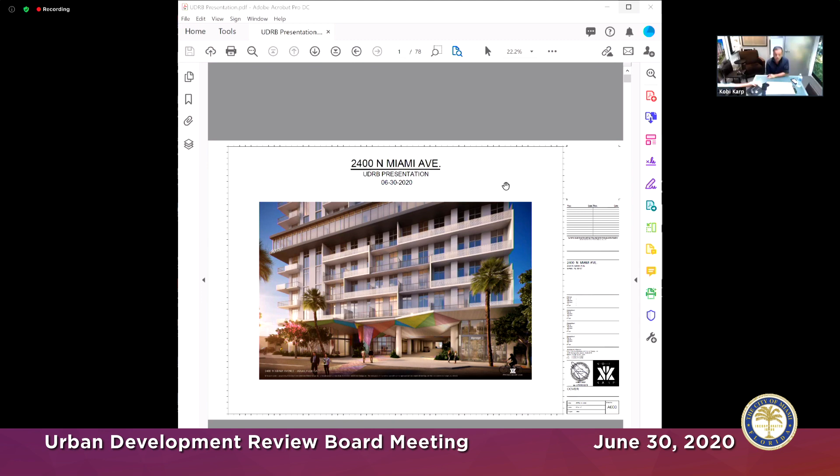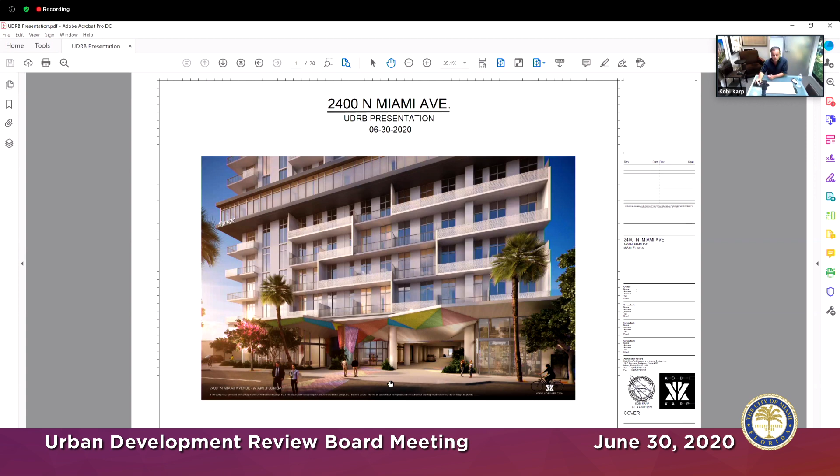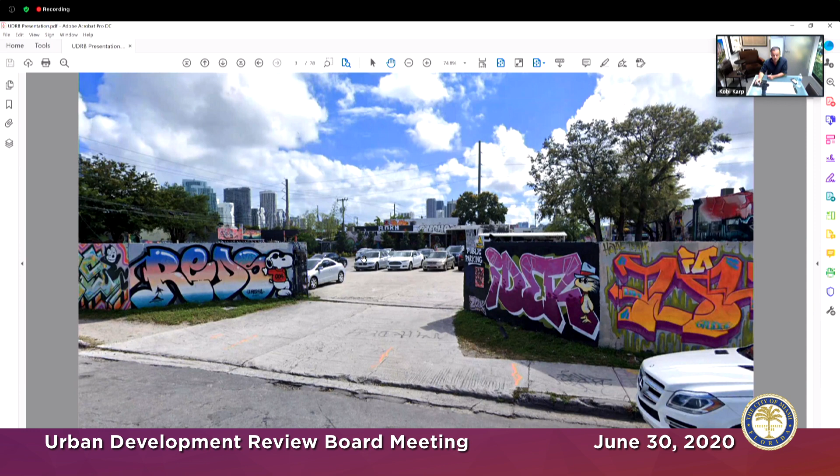This is the image at the ground level. So our site, as Mr. Warnick has mentioned so eloquently, is sitting on North Miami Avenue between 24th and 25th Street. It is currently being or has been used, as you can see, for these functions. It is an important location on North Miami Avenue. We met with staff and the neighbors. Everybody felt that there is an opportunity here on this site to make it a more open, tropical, urban connection

between 24th and 25th. Not only along North Miami Avenue, which obviously is more important, which is why we carved out the corners on 24th, carved out the corners even more so on 25th Street, and introduced not only the commercial spaces, but also some amenity and lobby in these areas, but also wrap it around in a very genteel kind of fashion where people can walk within the landscaping and sit in a nice protected area and walk onto the site. We felt that there is a greater opportunity to make the site porous and really create a more landscaped area from 25th Street to 24th Street, and really create a nice anchor to North Miami Avenue.

At the same time, I'll just take you through the building quickly if you give me a second. We're setting it back. We have a mezzanine parking. We have a typical parking level here with our studios wrapping around. This is level 2 through 5. This continues on to where we have a large amenity area, because obviously as the sun rises in the east and sets in the west, the building steps down into this direction, meaning towards 24th Street, and offers us sort of a unique stepping up effect right here.

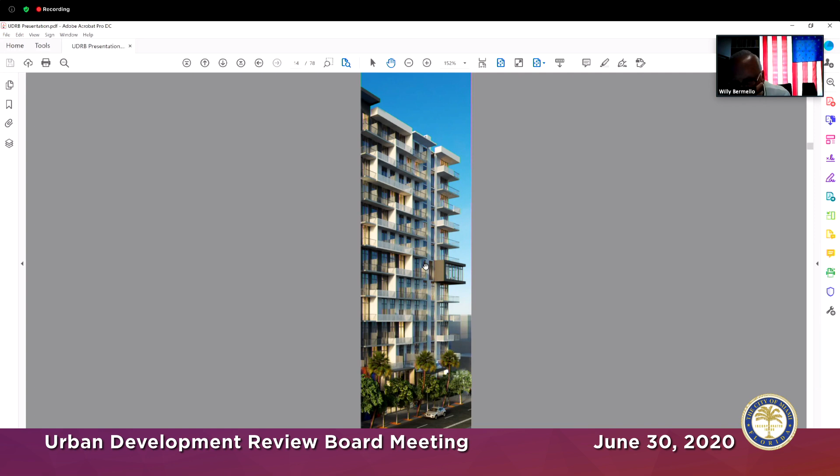Do any members of the board have comments or questions? Yes. I do. How do you want to do the process? Do you want to give everybody an opportunity? Yes, Robert, I think that would be the best way, and those that are more anxious go first, and those that are still thinking about comments can go towards the latter, and not everybody has to speak. Okay, give us a chance to speak. So you want to go first, Robert?

All right. Kobi, good to see you again. Hope everybody's doing well, and difficult times, that we'll get through it.

Can you go back to the ground floor a second, please? Yes, Robert, right away. And let me commend, I think you've done a very nice job in this project. I like it a lot. I think the way you have addressed the street is very, very nice. I think you have activated all three streets in a very nice way. One area that I'm very concerned, I don't think it really functions at all, is the service, particularly the trash area.

Basically you're going to have to take out your trash containers to the street to have the truck service them. Because I was looking at your elevations of the building, the ground floor is 15 feet clear, or maybe even less. So when you pull up the trash from the residential trash room, you have to take it out through the internal drive, which is very nice. You cannot do it in the loading zone. You have to take it out to the street for the trash truck to do the maneuvering.

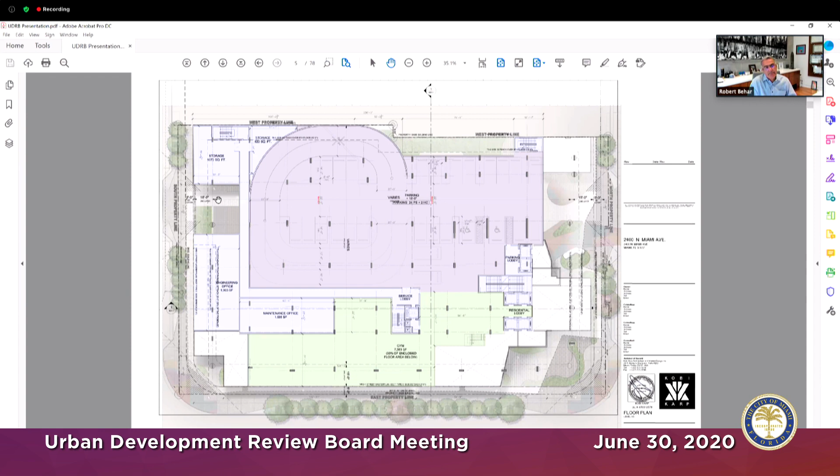So you have your ramp over that area. So you will not be able to carve it out so you could get a truck to do the maneuvering. You need like 23 feet to do that. Right. So how are we dealing with this, Taylor? We're bringing the truck over here and then bringing it over here, right? Yeah, we do have the double height carved out space on the south portion of the internal paseo as well, and we'll continue to study that with waste management.

But how many units is this, Kobi? This project? 236. And some units have 6 bedrooms. And you have a little residential trash room that is 480 square feet, according to this. And you have to drag those containers through your internal paseo. It seems to me that maybe the loading area, trash room, needs to be relooked at, because everything else is working very nicely. The ground floor is working, with the exception of that. And the elevation looked very, very good. So that's a concern to me, how the service really functions in this building.

No, Roberto, I think you have a very valid point, and Taylor and I are just sitting here talking, and we're going to study and flip these around potentially and get more square footage in there. Absolutely. We'll take care of that. Right here, you can flip these around. Robert, is that it? Yeah, that's it for me.

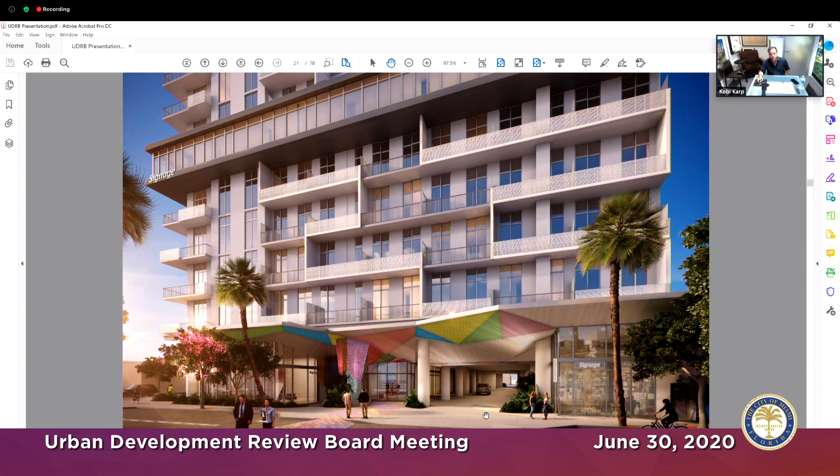And I think you are correct. That's why also the residential lobby and that whole circulation area over here promotes that kind of drop off. I think that ultimately, you are correct. It's a pedestrian circulation, and we wanted the pedestrian to come, walk through here, walk through the landscape, continue through. Look, I would like to find ways to improve this area, right? This rendering is just the beginning of it.

But I think that at the end of the day, when you look at the way we treated the Wynwood 25 Passage Paseo that connects the two streets, it became a very important destination for the project. I'm trying to go back to the ground level. But your comments are very well taken, Anthony. Let me study that and let me see what I can do on that.

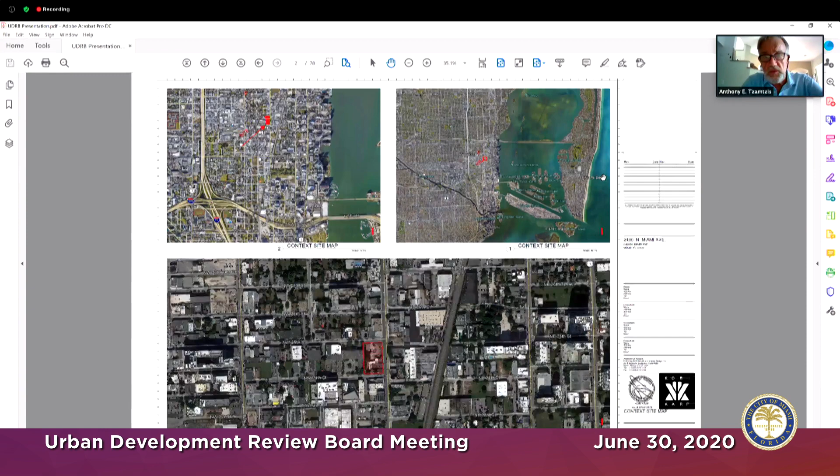Perhaps along the west property line, maybe there should be a way to walk along the west property line with landscaping and stuff, because I don't think it's very inviting to walk into a space that has a cover above you and the fumes of cars and stuff.

I don't know. I would like to see a portion of that completely without a cover above and with landscaping, and more friendly to pedestrians because of the nature of 24th and 25th, which are very pedestrian-oriented streets. Yep. Okay.

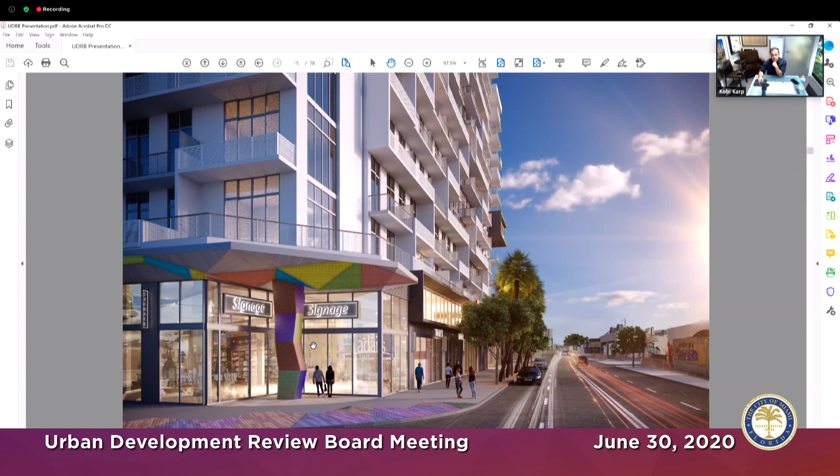Well, we go to the rendering from the south on North Miami Avenue. So what happens is that we have the parking behind this liner right here. What we have done is the stepping back of the building itself is right here, yet the corner pullback is right here on 24th Street. And then we did another pullback. This is a close-up of that corner treatment on 24th Street. And then also from right here on 25th Street, under this area right here, it's notched out even further.

So as the building does step up, and this pops out right here, the office, our niche is right here. This is the little juice cafe and lobby, and that's the gym. And then pedestrians would come, and this is the other retail on 25th Street. And then here's a close-up, if I may, of the same. You have a covered seating area that faces to the east and to the north. And this is the retail that goes further to the west. And then this is our lobby. The gym would be here with a staircase to the upper level, to the mezzanine level as well.

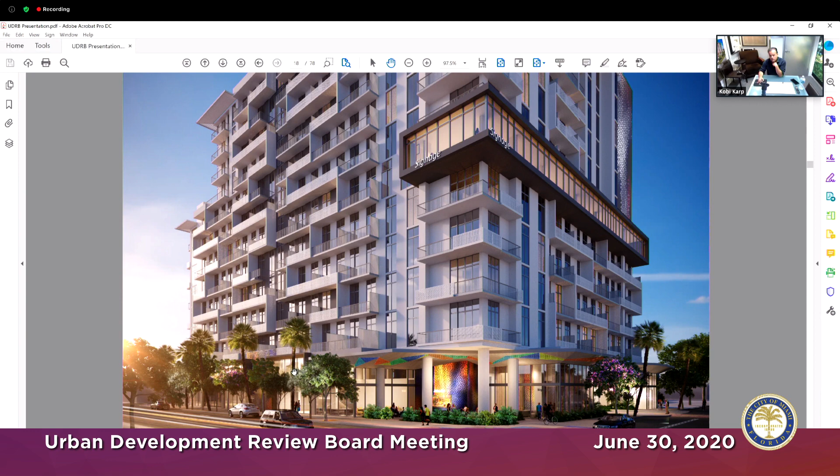If you just give me a second, I'll take you back to the ground level and I will be able to show you. And here you can see how we stepped up. So this is level 7, level 8. And then that's the amenity area carved out. But then at level 9, the building steps up. 9, 10, 11, and 12. Can you see my little hand on the bottom right-hand side? Yes. So this is level 9, 10, 11, and 12, so that you get more light and air coming here along a southern axis between east and west. And this is the landscaped terrace area.

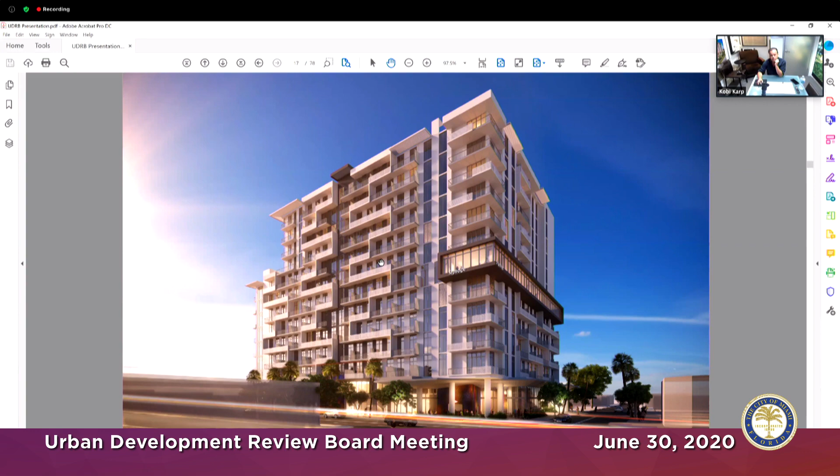And furthermore, you have it stepping up here, but let me get you to the ground level. If you just give me one second, Ligia, I'll put you over there. I'm trying to get, oh, I went the other direction, right, Taylor?

That's what happens when you're 58 years old. Wow, 58 already. Yeah, 58, Dean. You know, time flies when you're having fun. I believe it. Sorry. Excuse me one moment. Dean, you have to put your camera on, please. Yes, my camera's not working. I'm sorry. I'm working on that. I'll get that shortly. Okay.

So this is, Ligia, to your point. We carved out this corner right here as a covered amenity area with a landscaped and seating area. Then we also carved out this corner on 24th and North Miami Avenue. And then we made a notch here as well. And then we made more carving outs along 25th Street, right here where the retail is and where the residential is.

Yeah, so the ground floor was clear. It was more on the elevation side, on the North Miami side. I just feel like lately with all the new construction that's going on, it just kind of hit me a couple of weeks ago. I hadn't been driving around, and the project just north of 29th Street seems to be really close. And my first impression when I saw the renderings of the North Miami Ave side, it seemed like the massing was pretty big. You had mentioned that setback, and a couple of the perspectives that you showed, with the different designs on the elevation, I think are great.

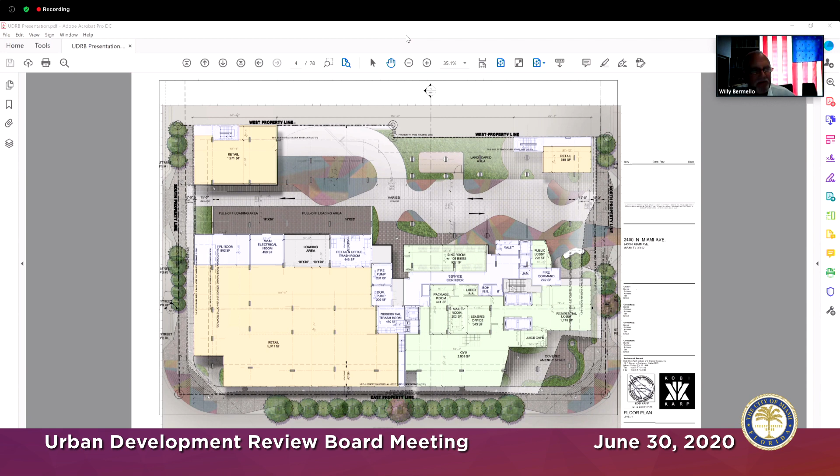Okay, and now give me one moment. Okay, so the next item we're going to hear. Let me pull up the agenda. I apologize. I was having some computer issues and have to re-pull up the agenda. Vicky, I have a question. If you want to take a 5-minute break, is that possible? You have to check with Mr. Bermello. Is that okay? Can we take a 5-minute break? Absolutely. All right, thanks. Okay, so it's 11:21 right now. We'll restart at 11:26.

Wait, Robert, are you in your office? I am, Willy. Hey, good for you, man. I'm here.

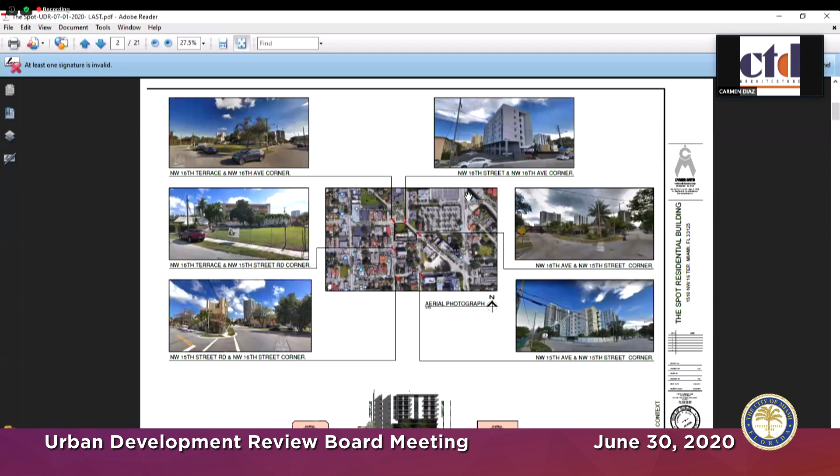Northwest, also the 15th Street Road, and the 16th Avenue. The 16th Terrace and 15th Street Road are the principal frontages, and the 16th Avenue is the secondary frontage. Around this neighborhood, there is a proliferation of multifamily on low scale, mid scale, and there's some upcoming new construction that are very large scale.

Ms. Diaz, I'm having a hard time hearing. I don't know if the other members hear well. I'm not hearing well either. It's like a big echo. I think what's going on is that she's got two computers on, and she's got two microphones on, and so it's picking up on both, because if you see, the screen keeps jumping from Carmen to Gloria. Yes, let me turn off that one. Look, can you turn off that computer?

So only the mic should be on for the one that says Gloria. Yes. The mic should be muted on the other. Okay, thank you. Correct, correct.

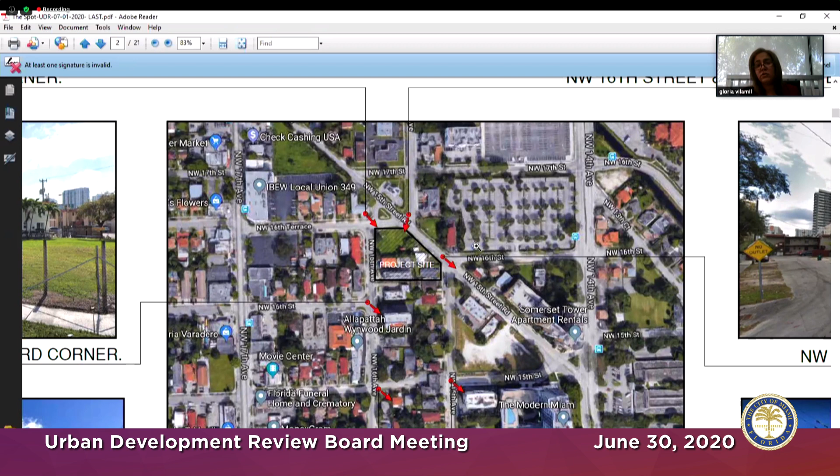The building will be within walking distance to the Justice Building. It's going to be also within walking distance from the Health District, the Jackson Hospital, and also is within half of a mile of the Civic Center station, the Metro Rail, and will have also easy access to the expressways around the corner.

Let me go to the site plan. The building lot is irregular. The lot is about 13,000 square feet. The building will be composed of 8 stories. 3 of them will be the parking, first, second, and third level. And above that, we will have residential. We will have an amenity deck on the 4th floor.

Let me go to, here is pretty much all the areas of the building. At ground floor, we will have the parking with the lobby facing the street. Second floor and third floor will be the parking. The parking in this area is where it will extend to the second layer. And that's why we're here basically, to ask for the approval and recommendation from the UDRB committee.

The building has in total 38 dwelling units, 45 parking spaces, with 1 2-bedroom and studios throughout the top floors. Regarding the Miami 21 code, we are in the urban zone T6-8-R. We're complying at this point with the maximum number of stories. We are not going over the lot coverage. We are within the lot ratio setbacks. So we're complying pretty much with everything.

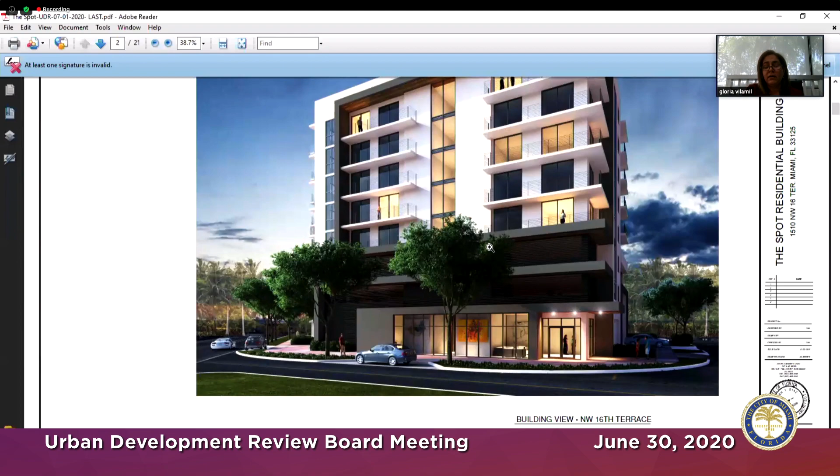The building will integrate into the site. It's not overpowering the surrounding neighborhood. We did something that will integrate with the urban context, with the orthogonal axis, and we are activating the pedestrian realm at the ground level, providing glass throughout the whole facade. Based on the recommendation from planning, we modified at the beginning of the process this area here to acknowledge that this street has a different angle. So we created at the ground floor a small courtyard plaza.

Let me go to the ground floor. Right here, we're acknowledging this area as the principal frontage. Although the rest of the urban site is very orthogonal and rectangular, this diagonal was acknowledged by this courtyard that we created here. At the ground floor, all the lobby has a glass area to integrate the street, to have visuals from the building inside and out.

We go to the main elevation. This is the main elevation or the principal frontage. Here we did an accent band that will separate the pedestal of the building from the top building. It's something that is very coherent, very rational, elegant, minimalistic, and the planes that you see here in the back go down in the same direction as the street, and they create a shadow and light play of geometric forms.

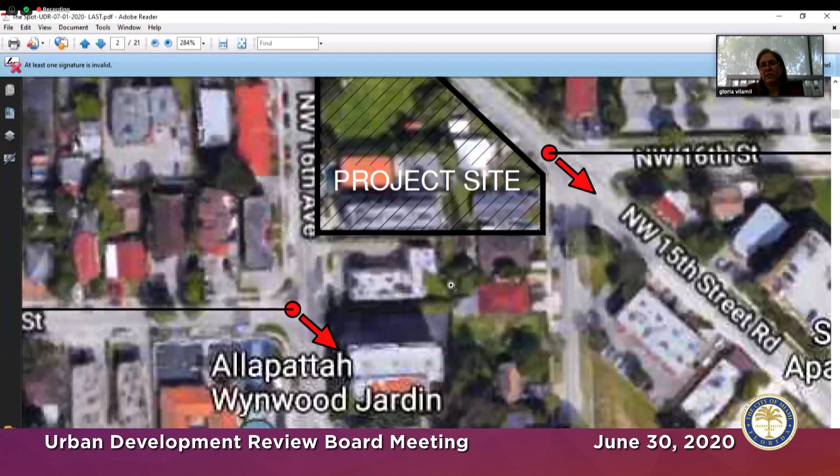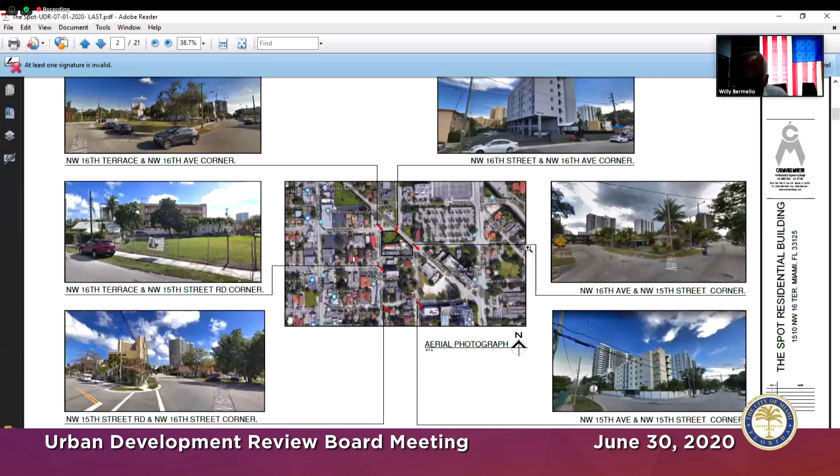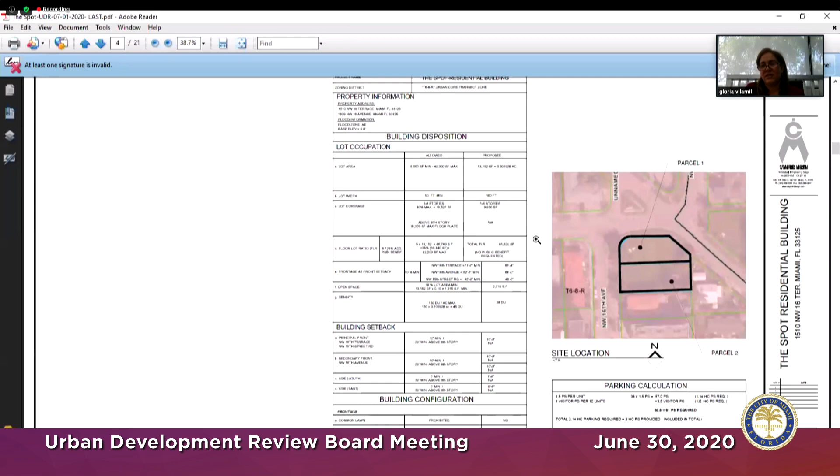Gloria, this is Willy Bermello. Do you mind going through the plans a little bit slower? Yes, please. Because you can't move through them, and thank you, Willy. Just keep in mind that I don't do this very often. You guys are very used to this, and we're not used to this. Gloria, this is our second Zoom meeting for the UDRB, so we're rookies and neophytes here, working our way through together with Vicky.

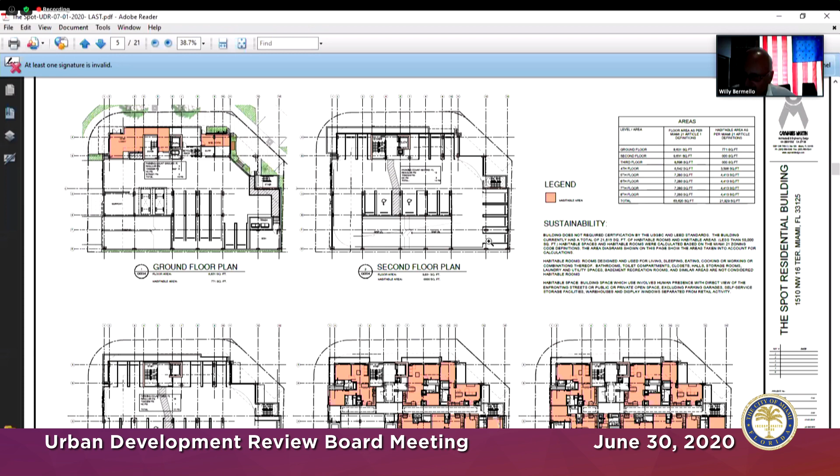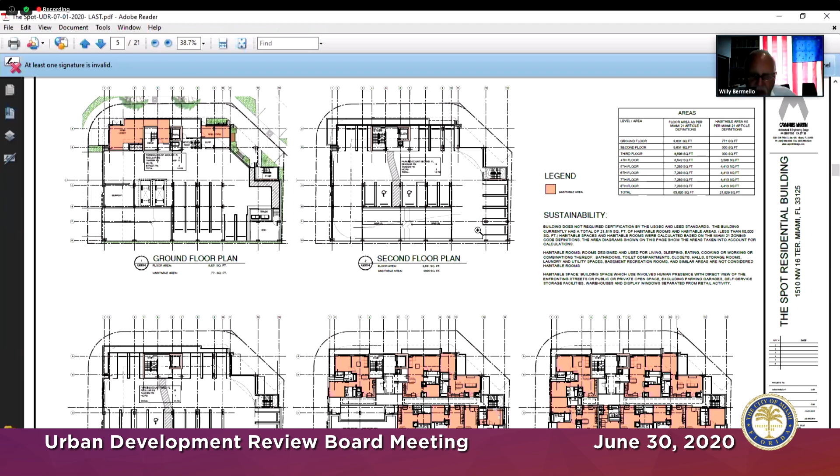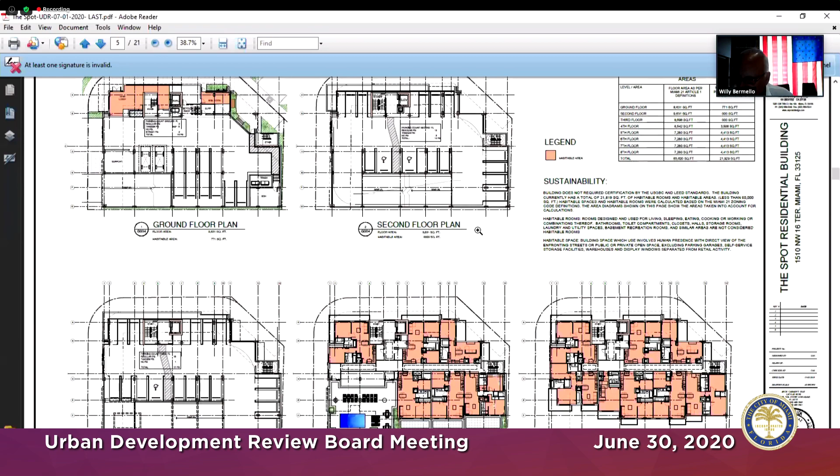Okay, here I have small scale plans, but you can see them all, or I can put the enlarged plans so you can see them better. You can enlarge each one. You don't have a lot of plans. Just the ground floor, your typical parking, maybe your amenity deck, and then the typical apartment. I think that should do. Okay. This is the ground floor.

You access the parking through the secondary frontage, through 16th Avenue. Where you see in orange, that's the principal frontage. All that is covered in glass, and this here is the other principal frontage too, where we created a plaza as requested by planning and zoning. So this plaza and that courtyard was something that we redid based on our meetings with planning and zoning.

Vicky, a quick question. Where's the loading here? The loading area is right here. Do you see it? So how do you come in? From the west? You come through here and you park here. The trash room is right at the back, which has to be carried out through this area, which is not that far.

Okay. So one of the waivers you got was for the reduction in the size of the aisles? Is that correct? Yes, that's correct. And I'm assuming you've done turning movement analysis to make sure that any large vehicle coming in here, whether it's trash or people moving in and out, can make these turns? We did the study in-house in the office. We didn't hire a traffic engineer for this project, but the loading area is a little bit bigger than the loading truck. So we're pretty sure they can maneuver in there.

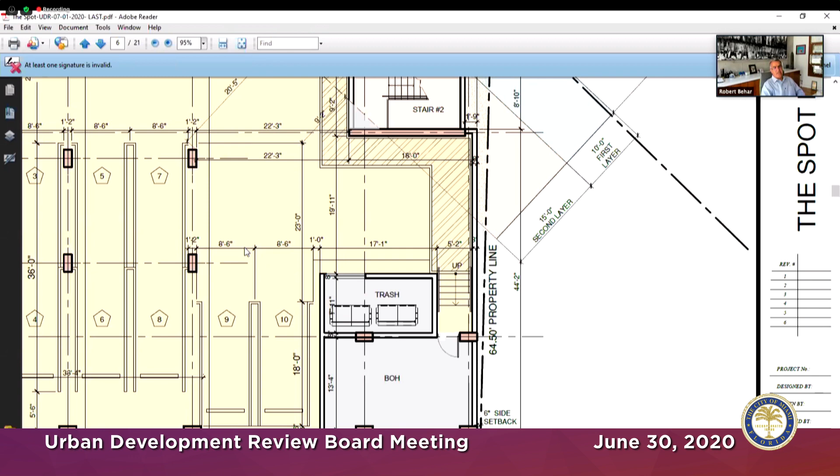Let me go back to next to your elevator, Carmen. Look next to your elevator. Yes. There's supposed to be a chute there. Okay, so basically you have a trash storage. So you have 2 areas. Correct. Okay. And then I suppose you roll the bins over, and I suppose that the bigger trash area is air conditioned? I think by code it needs to be air conditioned.

Okay. My next question is, by the way, I also commend you on the design. I think it fits very well, you've done a great job, and I think it'd be a great fit for this area. Can you elaborate a little bit more on the screening, which is basically the reason that you're here, right? True. The only reason that we are here in front of you is because of that parking garage.

It's supposed to be an artwork or a glass treatment. What we are doing is integrating the parking into the design as a whole. We have the screening samples here in the office, but mainly, when you read the elevation, the idea was that you have these concrete overhangs going around a volume that you don't see or don't read as a parking garage.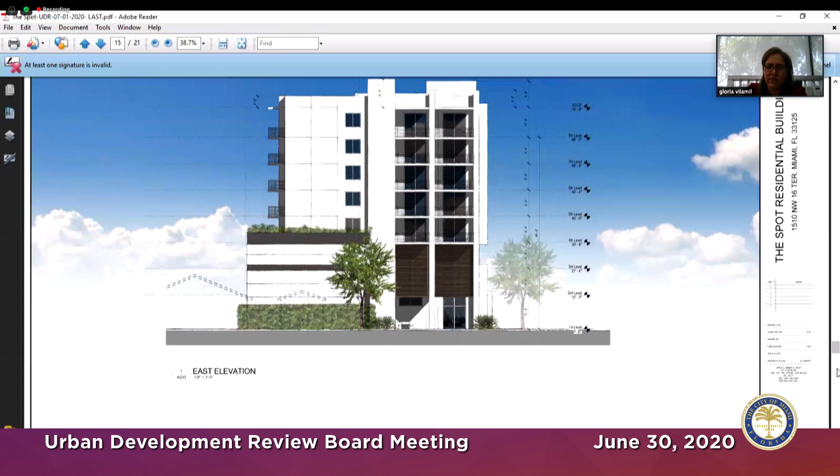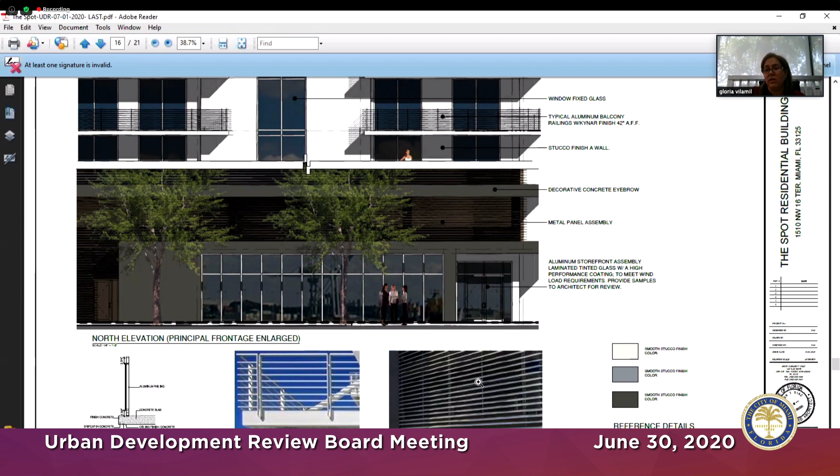Okay, that's very good. Can you go to the elevation sheet so we could see the screening? Yes. Or do you have another sheet that details how you're going to screen? Yes. Okay, this one I'm not. Just give me a minute. Let me go to the enlarged so we have a detail of that area. Yeah. This right here is where it's gonna be located on the garage. Okay. And we have a sample here that you really cannot see beyond that. Okay. No, that's okay. This right here pretty much tells the story.

The concern was, are you going to actually be able to see the cars parked or the lighting, and how much of that? But I see that these, I'm assuming those are metal. This is, let me see. You see this? Yes, we do. You cannot. Yes, that's very, very dense. That's very helpful. I'm glad you showed us that.

And I'm assuming it's going to be, is that a dark gray that you're showing? What I show you physically that I have here is not dark gray, but what we're proposing is going to be dark. Okay. Very good. Thank you. That ends my comments. Very good job. Thank you. Any other comments or questions?

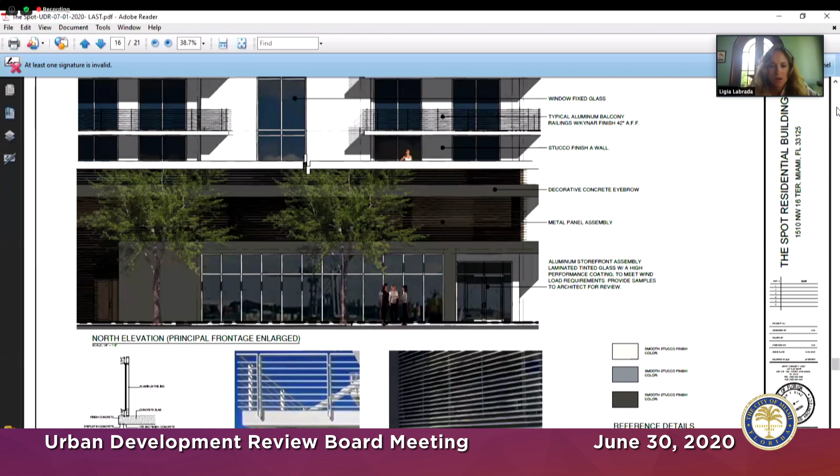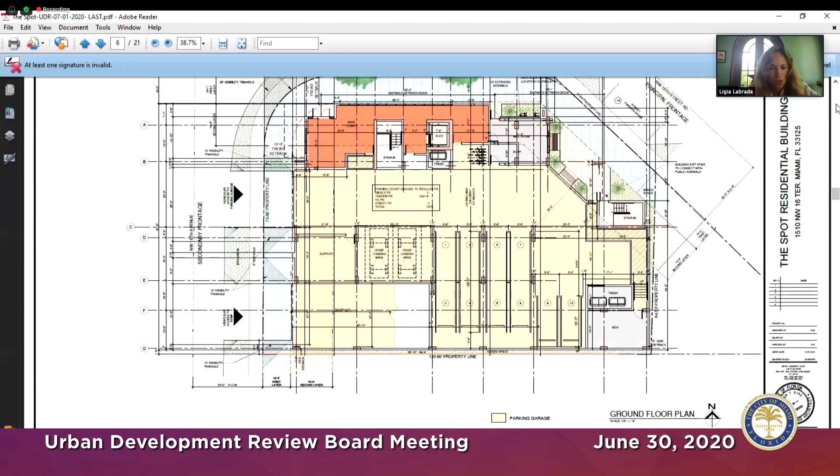Yes. I had one comment. Gloria, thank you for your presentation again. Going back to that little courtyard, is it possible, in order to activate that? I know you have a mailroom there, but it seems like it still continues to face the main frontage. That you would orient it so that there's direct access to that courtyard, and maybe that will give it a little more activation. Otherwise, it just seems like it's kind of leftover outdoor space.

I think that we can definitely connect it through the mailroom and the main lobby and do something even nicer. So yes, that's something that we can do. And I think it's a great idea. That would be my only comment. Thank you. I think it's great. It's a really nice project.

Willie, this is Anthony. Thank you very much, Gloria, for your presentation. I think you did a great job. I like the building. Carmen, not Gloria. I'm using Gloria's computer. Oh, you're Carmen? Yes. Carmen, I'm sorry. Your face has Gloria underneath, so. I know. I'm using her computer. I saw her computer.

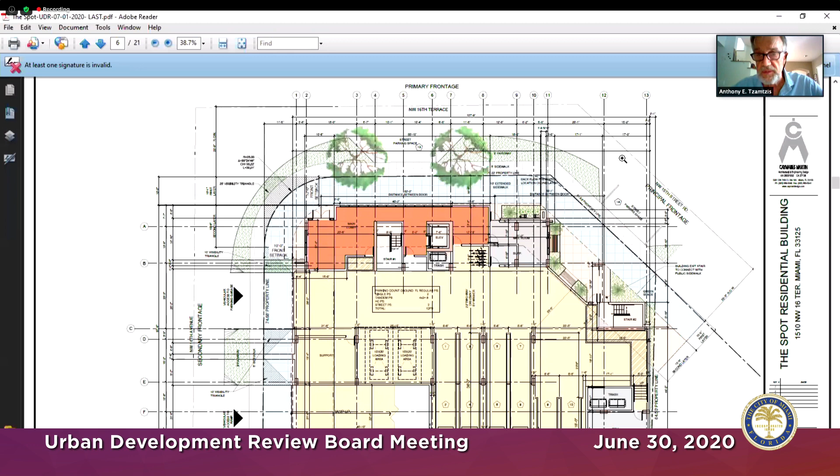You did a very good job. I think it's not an easy site, and you resolved it very well, and the units are very well laid out, and it's a playful building on all sides, both internally and externally, and I commend you for the work you have done. Very nice job. Thank you so much.

Anybody else? Yeah, this is Robin. I just want to say that I think this is an excellent project, and I agree with all the comments, and I was concerned about the garage screening, but I didn't see until this last portion the material that I think addresses that quite adequately. But again, it's an excellent project, and I too commend you very much. Thank you so much.

Hello, Carmen. This is Dean. I just wanted to mirror my colleagues' comments and congratulate you on a nice project. It's a demanding, tight site for sure. And the architectural vocabulary that you selected works well. And the rational geometries are appropriate and helped you avoid difficulties. There's two compromises.

One that I wanted to have you take a look at is the location of stair number 1, which basically cuts the lobby in half. I keep wanting to move that stair directly west to the west wall facade and move my entrance over so that I get a better lobby space.

The other thing is, having a trash holding room and wheeling the trash over is a compromise for building this smaller scale, and I almost wanted to flip the bicycles with the main trash room to facilitate that, because you're going to have to wheel those dumpsters all the way out and around to your west facade. And those are my two comments.

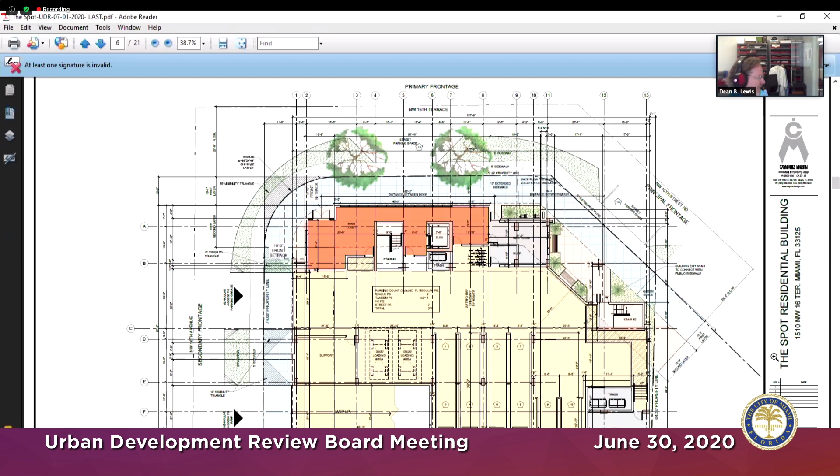Sometimes we cut a hole in the second floor to accommodate that, and they can pull in, at least head in. That's exactly correct. And where the loading area is, on the second floor you have parking. So maybe that could be achieved at an angle so the truck could come in. But then again, you're going to reduce parking spaces, which I know is a problem. But, well, you can pick them up perhaps on the other side.

If she were to square off that corner and lose that 45, she could still get two more. But anyways, look, I don't want to be the spoiler here. I think you've done a very nice job, great job, given such a difficult site. But it's something to consider, not only for the functionality of the building on a daily basis, but to me, having to get that trash to the street is not something that we should be

promoting. I'd like to suggest, Mr. Chairman, a motion to approve the project as presented with a recommendation for the applicant to review the trash situation at the ground level, specifically in line with the comments that were raised today. That would be the only recommendation. That's my motion. Anthony, would that include the comment from Dean Lewis for the relocation of the satellite trash room to the area that was shown as support?

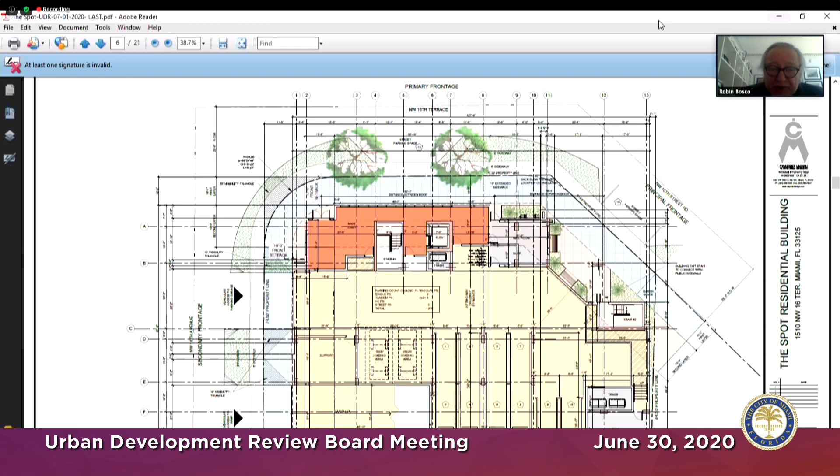Before the next item, this is Robin Bosco. Before we move on to the next agenda item, we had discussed earlier briefly an issue in the first presentation about conditions, and we had conditions in this resolution. I had spoken last week with Vicky about the minutes that were being issued from previous hearings. The reports, I don't believe, have included the actual conditions that we've recommended. Vicky, could you elaborate on that a little? The conversation we had, you said that you wanted to see the recommendations included as part of the meeting minutes, and I can do that moving forward.

So you don't need a resolution from us to do that? That I'm not sure. I have to check with the board attorney. No, I don't think you need to do a resolution to tell her to do it going forward, if she's agreeing to do it going forward. Just make sure it's captured in the minutes going forward. Okay. If you wish to pass a resolution, you can absolutely do that. It's up to the board's will. Again, I would just recommend that be included from now on in the minutes. Okay. So if you want to make a motion, you guys can definitely vote to have that going forward.

You want to make that a motion, or you're simply fine with the fact that Vicky said that she's going to do it? I have no reason not to think Vicky's going to do what she tells us, but... That she's not going to do what she tells.

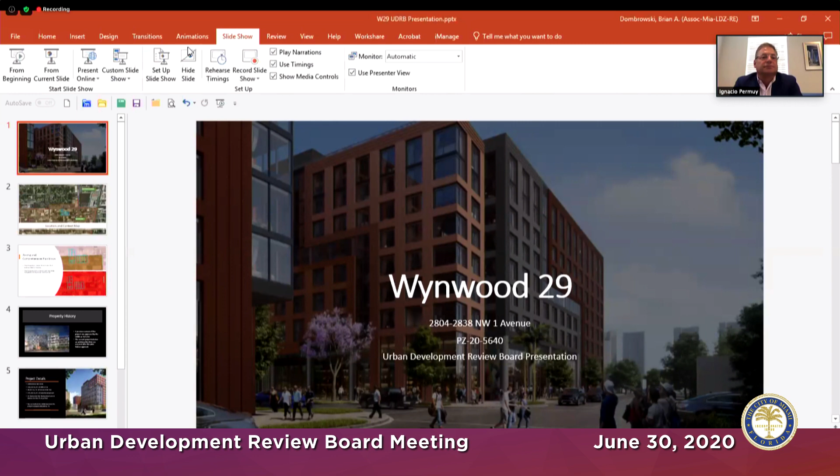Great. Thank you. With that said, our team is here. I'm going to let Brian make our introduction and presentation, and Ray Fort and the rest of the team. So Brian, take it away. Good morning, board. It's afternoon now. Brian Dombrowski and Iris Escarra, 333 Southeast 2nd Avenue. I'm going to pull up a very brief presentation just to walk you through some of the context for the property, and then I will turn it over to Ray so that he can walk us through his design. Can everybody see my screen? Yes. There we go.

So this is the Wynwood 29 project. Vicky went through the addresses previously, and we have our PZ numbers 20-5640. We're here today before you because we do exceed the 200,000 square feet. This map kind of gives you a context of where we're located. We're just outside of the Midtown Miami area in the northeast corner of Wynwood. Our site is bifurcated by Northwest First Avenue, and we run from 29th Street to 28th Street on the west side, and we are located on First Avenue and 28th Street on the east side of the property.

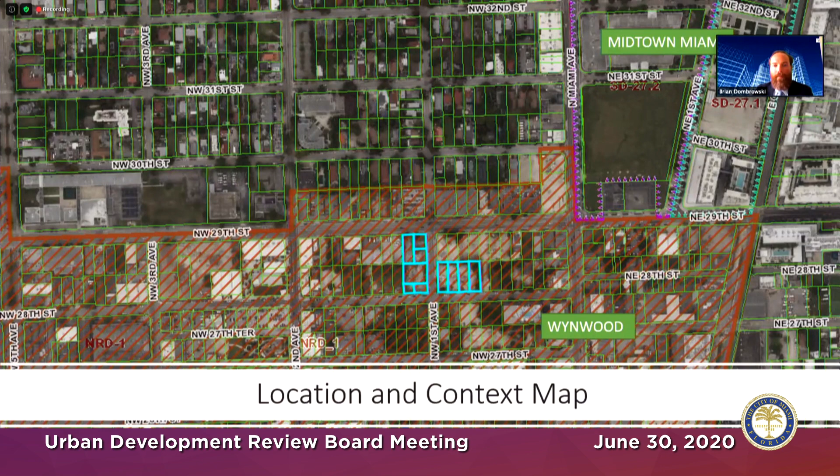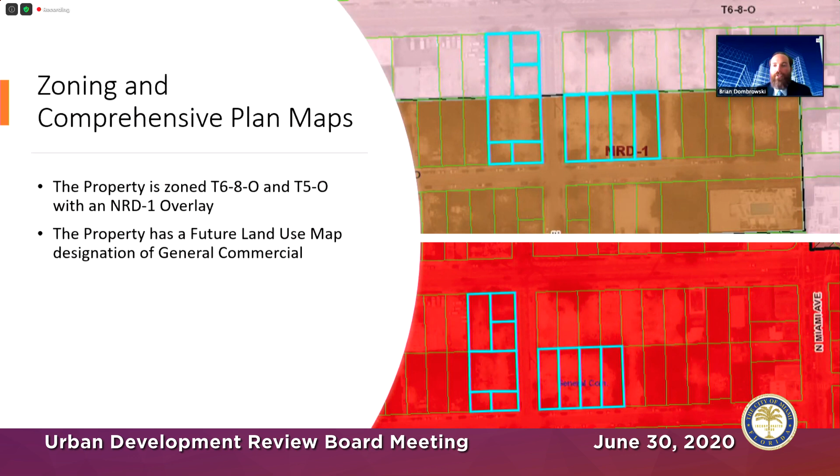We're split zoned, T6-8-O, T5-O, and we have the NRD-1 overlay for the entire project, and our zone designation is general commercial. This site may look familiar to you, because back in September of 2016, we came before this board and were approved. This project that we're bringing to you today is a slightly modified design, and it has been updated because we acquired an additional parcel since that previous waiver was approved by the city.

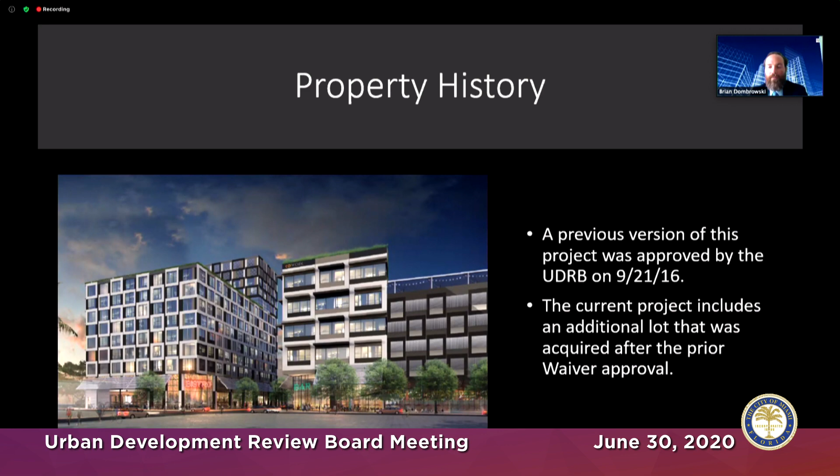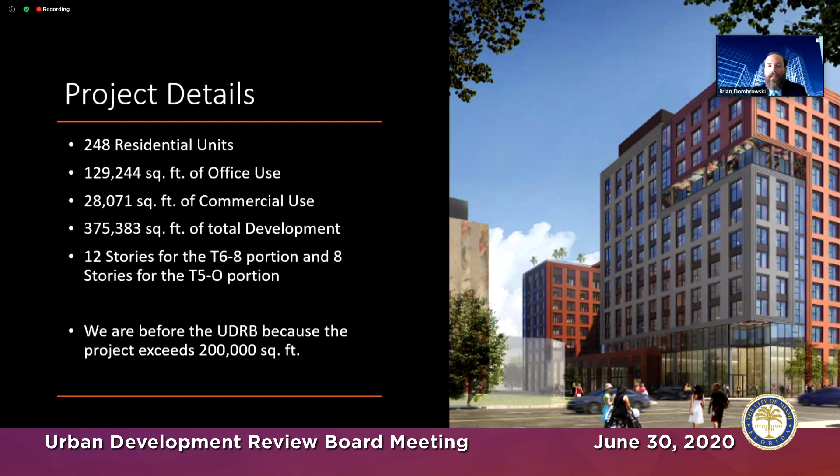We're proposing 248 units with almost 130,000 square feet of office and over 28,000 square feet of commercial use. We're providing 12 stories on the northern T6-8 portion and 8 stories on the T5 portion. Vicky went through the waivers, and I know that Mr. Bermeo wanted us to kind of highlight why we are requesting those waivers, and I will let Ray get into that a little bit more on the specifics for why his design requires those.

But to get into that a little bit now, we are requesting the 30% parking reduction waiver, which was previously approved under the prior waiver for this site. We are requesting an increase in the maximum lot size in the T5 portion, which was previously approved on the 2016 waiver. We are utilizing the NRD's flexible lot coverage program in the T5 portion, which was previously approved on the previous waiver. We are requesting a 10% increase in lot coverage for the T6-8 portion.

We are requesting loading access from a principal frontage, which was previously approved on the 2016 waiver, and we are also requesting a reduction in the one-bedroom units, a 10% reduction in the minimum unit size, which will allow us a little bit more flexibility on those units. And Ray can discuss which units those are, the number, and why we are asking for that.

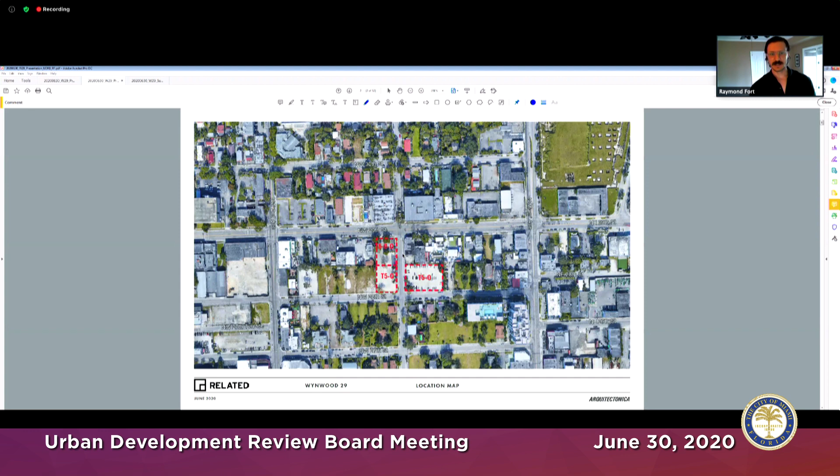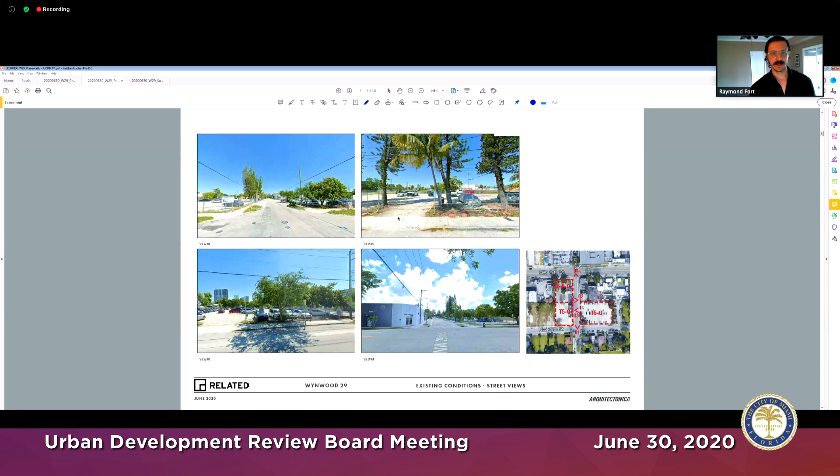It's currently a vacant lot. There are no buildings on it. Here is some aerial imagery, but I think what would be more accurate to start talking about, these are the vacant lots as they are today, as you can see, is that this quadrant of Wynwood is very quickly becoming sort of the residential sector of Wynwood, a little bit off of Northwest 2nd Avenue. It's a little bit quieter. You know, there's not so many, I guess, bars and establishments pre-COVID.

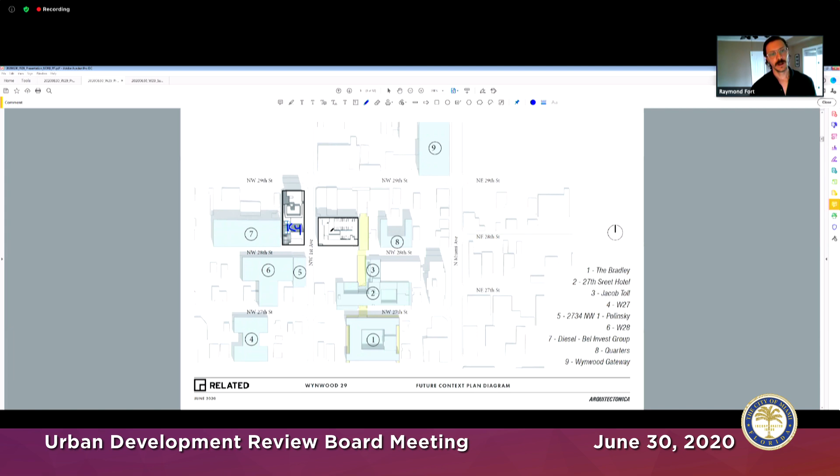But I think that will continue eventually once we get through this period, obviously. And basically all of the surrounding projects are planned to be residential projects, and this use is also in keeping with it. We're proposing 248 residential units. There's 164 on this side, and there are 84 units on this side.

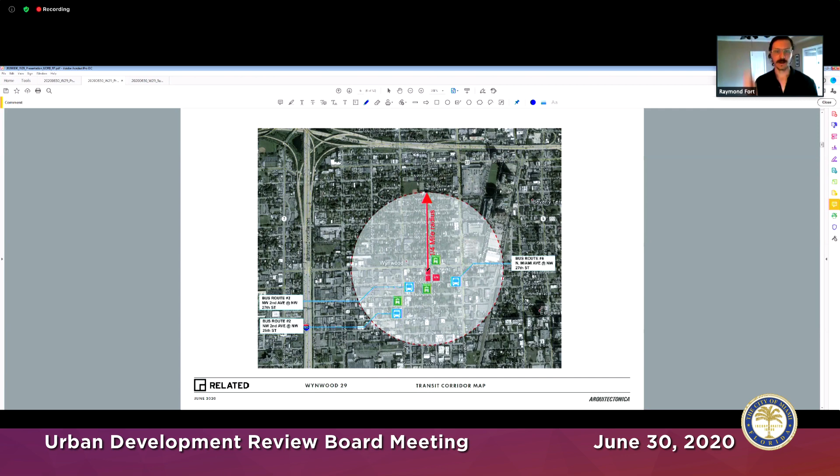But let me take you through some of the project detailing. There's also a waiver, and I'm bringing this up because you thought about it, a reduction in parking. We're within a quarter-mile radius of several bus routes and corridors. So we're utilizing the parking reduction for the project in order to not have such an impact on parking, of course.

So starting with the ground floor, and this may be a good place to start in terms of the project arrangement, knowing that this is going to be a woonerf and a more pedestrian-oriented street, we wanted to make sure we prioritized retail along that frontage. So what you see in the pink color is all retail, and what you're seeing in the green colors are the residential lobbies. We've also located all the back of house elements to the interior lot lines.

And we looked at a little bit of context, and there's a project here that is going to have its loading operating right in this zone. So we thought it was okay to stack essentially the use to that side, but also making sure that we're prioritizing the retail over here. And on this end, there's also back of house operations occurring in this proposed project here. So we have our loading occurring on that end, once again prioritizing the retail frontage on Northwest 1st Avenue.

A couple other things to note as it relates to lot coverage and setbacks. There is a waiver for the lot coverage. One of the reasons why we're asking for that is that once we start to pack in the programming here, it naturally occupies some space. But that doesn't mean that we're taking the project to the minimum required setback. In fact, at the corner of Northwest 29th Street, we've actually pulled back the building to be at the 15-foot setback line. And that goes all the way up to the 12th story.

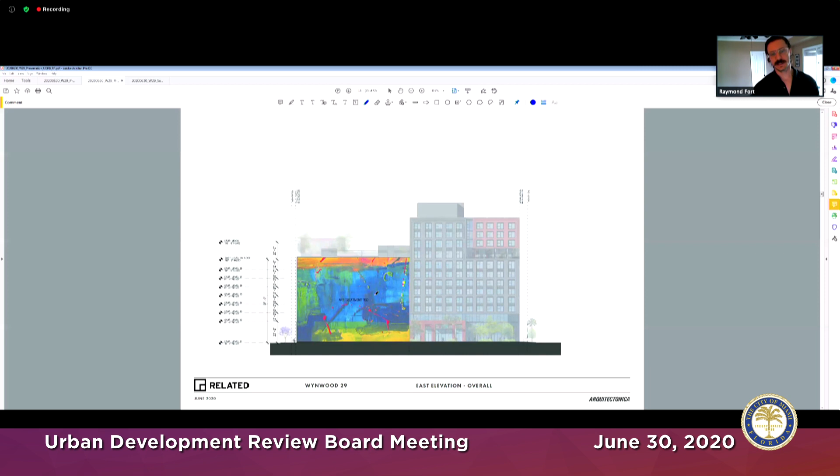So then moving into the other elevations, we're sensitive to what direction walls are facing. So any walls that are currently facing lower buildings will get an art treatment. So this is the east elevation of the west building, and east elevation of the east building. So this is actually the garage building. And this made sense to place some art treatment here because there is that low passage zone that is adjacent to it. It's a low building, so it made sense to put in that location.

When we look at the south elevations, this is looking north. This is Northwest First Avenue here, that future plan. We take the composition of what we had on the main corner, which is Northwest 29th and Northwest First, and brought it down to all the other levels of the project, continuing to use that motif of the scored corners and varying the colors of the terracotta tones.

In some cases, the building comes all the way down to the ground, as you can see here, to give it sort of a more grounded feel. And in other conditions, we lift the project up on a series of round columns and give that some art treatment. So there becomes variety as to how the ground floor is treated.

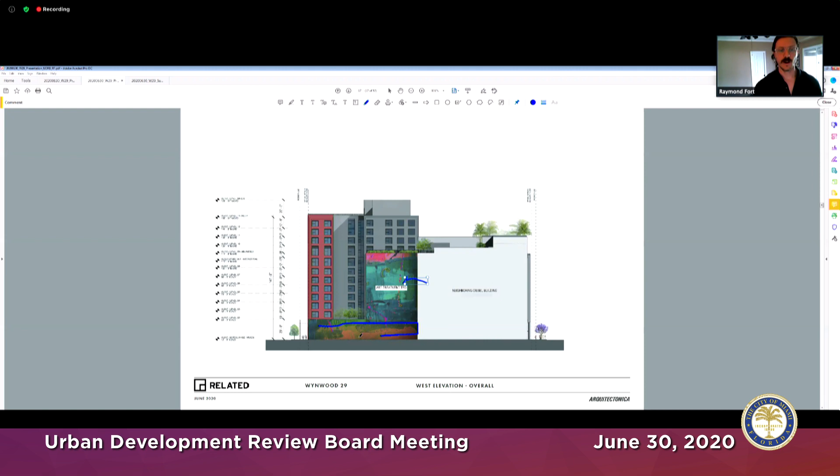This is the west elevation of the west building. It should be noted that there is the proposed diesel building there. It's one of the reasons why we inverted our plan to not have to look at a solid wall condition there. But outside of it, where we have a low building adjacent, is where we placed art treatment above. So then this is the east block on the west elevation. So once again, continuing that idea of a variety of terracotta tones.

And also we looked at how the window conditions were treated, and we're pretty excited that when we get to the 3D, we create this almost bay window corner condition. It's not quite a bay window, but in the sense that we have a glass corner on this very industrial grid that is proposed throughout the project. And these are all operable windows, it should be noted. And this is window wall that creates the split between the two volumes.

So then looking closer at the street elevations, one of the ways that we detailed it was by carrying that linear reveal and raking condition in the stucco down to the ground floor and defining these columns a little bit more, almost in a way that we're taking maybe what would have been a traditional column that had some fluting on it, but now just turning it into something a little bit more contemporary and having a little bit more of a tactile feel.

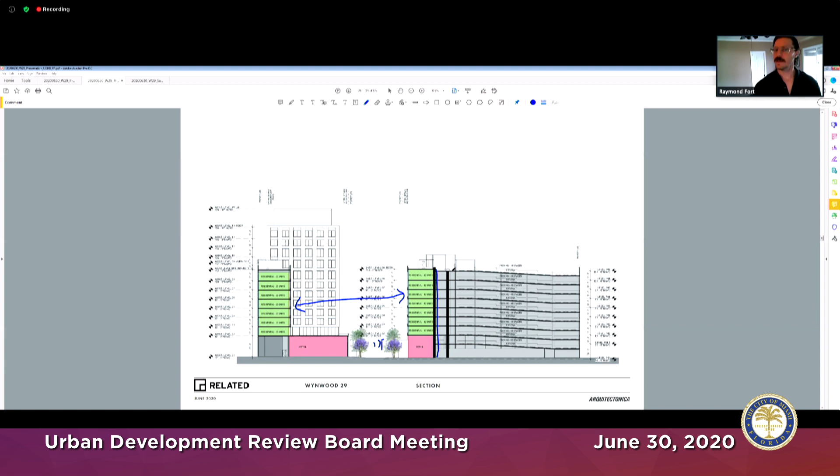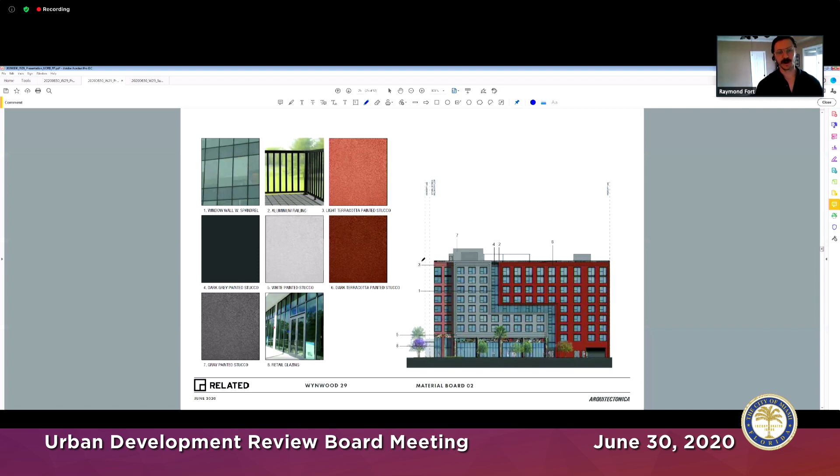So then, once again, we're varying these colors of the terracotta tones. Almost in a way, it even harkens back to some of the brick tones that you might see in some industrial buildings. But once again, trying to keep it sort of more modern and more catered to the neighborhood.

In terms of the project's massing and the art locations, this was probably a better way to define it. We've identified locations such as the east side of the east building, the inside face of where the building steps back, where we have that large setback on the corner of 29th Street. The areas that will enclose the overruns and mechanical areas on top of the building. And areas that have the facade exposed to major right-of-ways, but clearly not in zones where there is planned to be another project, such as right here.

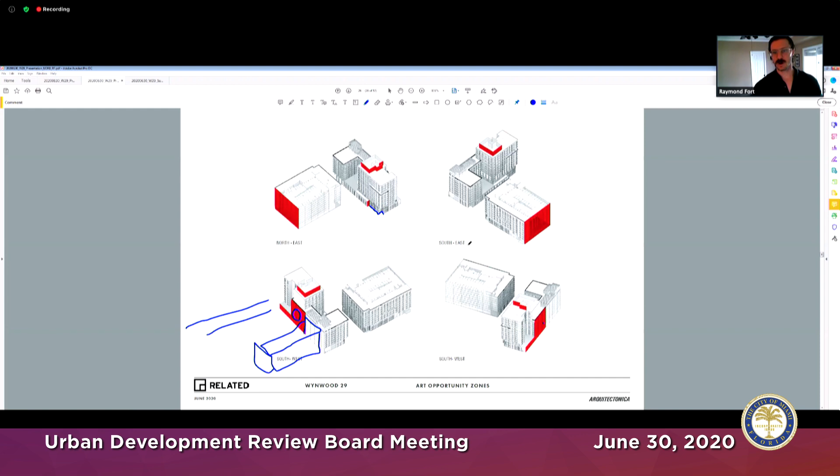And this mural is the same as this one, and there's a couple of repeats here that are the same here. But I think it tells the story of where we're planning to do it. Just wanted to give you a couple of vantage points.

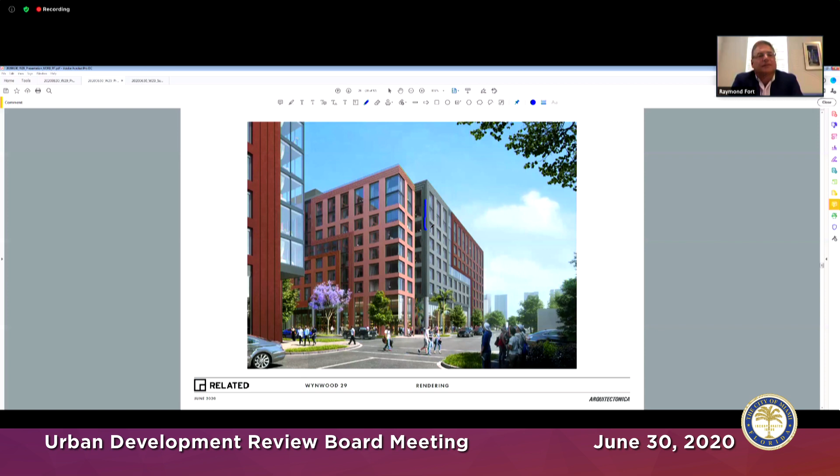And then in this case, we just create the sensation that you have two volumes that are abutting one another, almost sharing that corner condition. But one is coming all the way down to the ground and the other volume is lifted. So once again, creating that variety in form. And all of these are different colors, of course, each of those volumes. Oh, and this was that corner glass condition I was telling you about, in that we didn't necessarily cover up every single corner. You can see that the raking is applied here, but it's not applied here. And we like that it also has that variety in unit type.

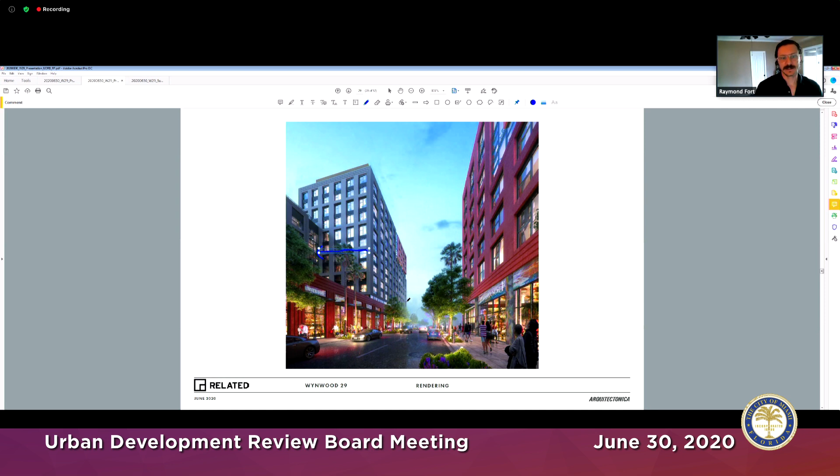This is a view looking down Northwest First Avenue, in the north direction. You can see the courtyard above that steps back from the T6-8 portion of the site. That's the level 2 courtyard. And then once again, looking south on Northwest First Avenue, and we have the level 2 courtyard above in this condition here. But it creates the notion that you have this L-shaped volume, and that is accentuated by that detailing I was telling you about. And that detailing makes its way into the louvered condition. We want to repeat a similar kind of spacing, given that it has to have the necessary shading limitation, but using that linear formwork to inform other parts of the project. So that's the main architectural side of the project.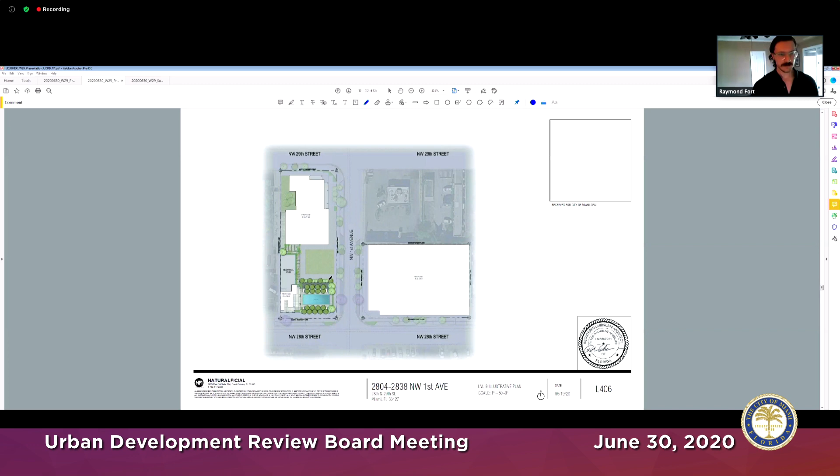This is the amenity deck on level 9. And then, oops, I must have missed that page. Let me see. And then the amenity deck on the roof level, level 13. It's a small area, really intended just to be for the residents' use, but really gives that great vantage point out towards, this is east I'm pointing to, Edgewater and Biscayne Bay.

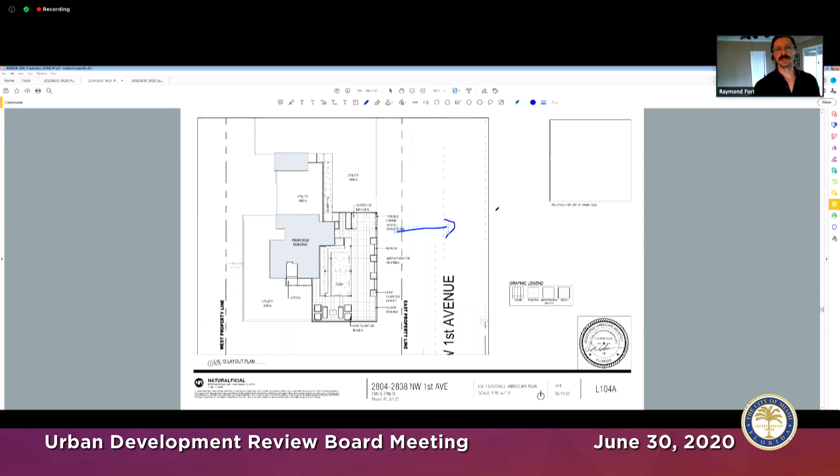So the planting palette kept native, kept diverse, in keeping with the Wynwood Streetscape Master Plan. So there's a series of species that have been designated for the area. It's intended to be a little bit more funky, so the variety of trees is, in my understanding, a little bit more expanded beyond what is typically seen on a streetscape in the city of Miami. And I think that's the project, and I'm glad to answer any questions.

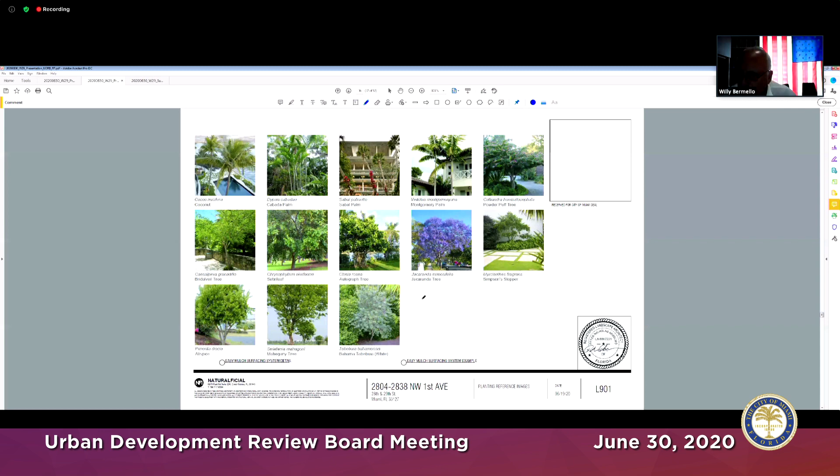Thank you very much, Ray. Excellent presentation. Thank you. Appreciate that. Ray, can you take us back to the ground floor, please? Ground floor site plan. Absolutely.

Okay. I have a question, if I may. Yes, go ahead. What is the material that is red, the red material, the terracotta color? Is it like painted stucco? Yes, that's correct. It's painted stucco. Okay.

So I'm glad you asked that, Tony, because I think that the project is beautifully designed. Ray, I'm kind of like your number one fan. You're very talented, and you know the issue of Florida sun is that it's not forgiving when it comes to bright color paints. So my question is, are you going to try to do something that will maintain? You know, usually the feel of that is that you have an industrial building with the use of brick. In this case, there's no brick. It's painted stucco. So maintaining the crispness of those colors over a period of time, do you have any concern about that?

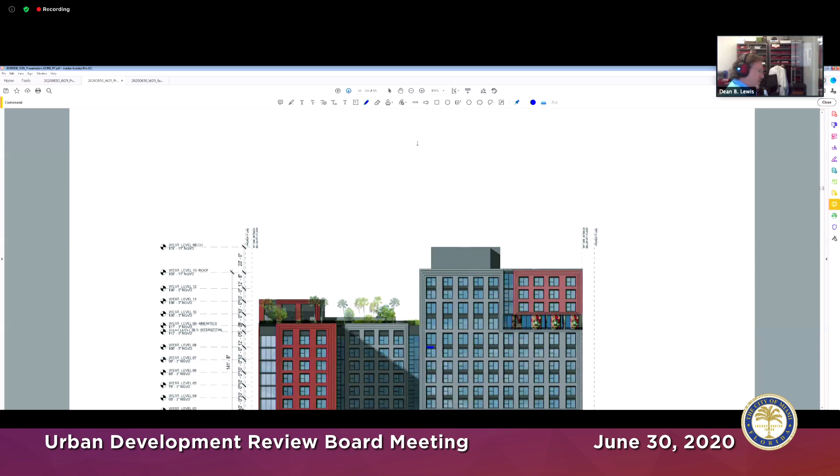And I think you would agree that allowing these volumes to shift more in the vertical dimension, particularly at the upper floors, would further reinforce your design concepts and respond to our concern of the somewhat rigid hold back, if you will, tension that we'd like to see released, and better adhering to there's a sculptural quality and history to Wynwood, not just industrial. And then the last recommendation I have is on level 2, if you could go down to the second floor in plan.

Okay, perfect. You'll see that the entire project is parked in the East Tower, and you have a fabulous lanai courtyard, which is kind of landlocked there with the exception of the views. I would highly recommend considering a pedestrian bridge from the east lobby over to the lanai garden and then penetrate to your core. Yes, you got it. And we've got pedestrian bridges working well on these larger block buildings in Wynwood already, and they're exciting and they add a sense of character. I think the demand there is justified. And that concludes my 3 comments.

Thank you. Okay. Thank you, Dean. Any other comments from our members? Yes, thank you, Willy. Ray, I'd like to commend you. I think you did an exceptional job starting from the massing to the articulation of the building and breaking up the massing, especially where it's a lot easier just to put a double loaded corridor, specifically creating that courtyard. I think it truly enhances and breaks up that massing. And it's a great addition to that project.

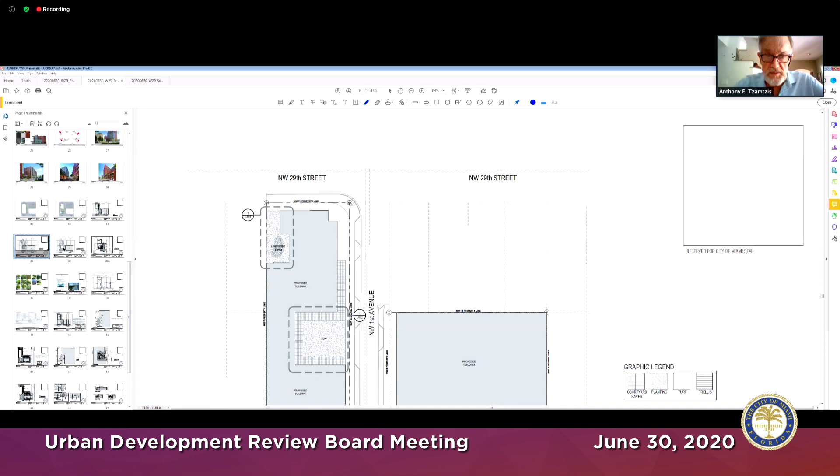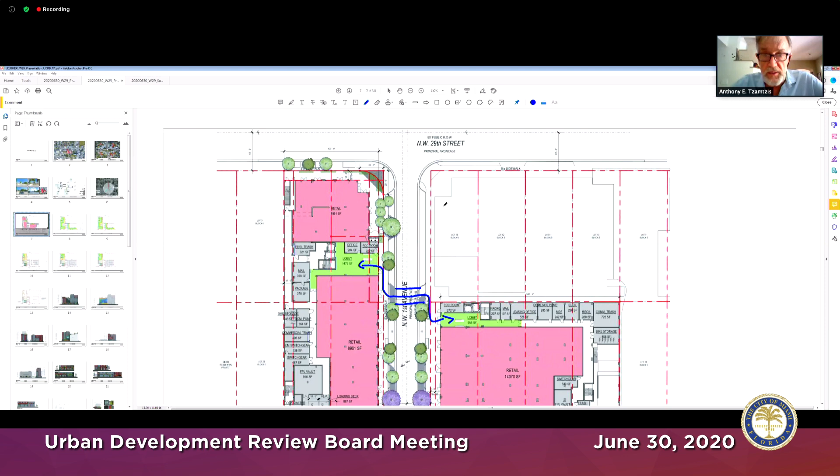Yes, we're working with Public Works to get a crosswalk implemented mid-block. Okay, so that's my question. That's my point. That there should be something that maybe has a cover along the sidewalk or something, that the experience of enjoying the store, as Willy is suggesting, is not a daily event. The daily event is go back and forth from where you were to your apartment. That's your daily routine, all right?

I think there should be something major, like a celebration of some sort of connectivity between the two buildings that is poor in this. I don't know. There should be something very special connecting the two buildings. Mm-hmm. If I could also just make a comment, we have discussed the ability to put in a bridge like Mr. Lewis had mentioned and recommended. That particular option would require City Commission approval separately and apart from the design. So it's not being included now because that has a separate process for it, but it has come up from time to time on discussion, including that potential option.

Yeah, the bridge would not include the enjoyment of the cityscape or the city activity as much as the solution of walking on Northwest First Avenue, the pedestrian crossing. But that pedestrian crossing should be a major component of your project. I think we should help them with making sure the record does reflect our recommendation to integrate a pedestrian bridge and facilitate the commission approval. And we integrate elements such as a pedestrian bridge frequently. And you identify it is contingent upon, of course, commission approval or other. But it's great to know that you've integrated that as an element already.

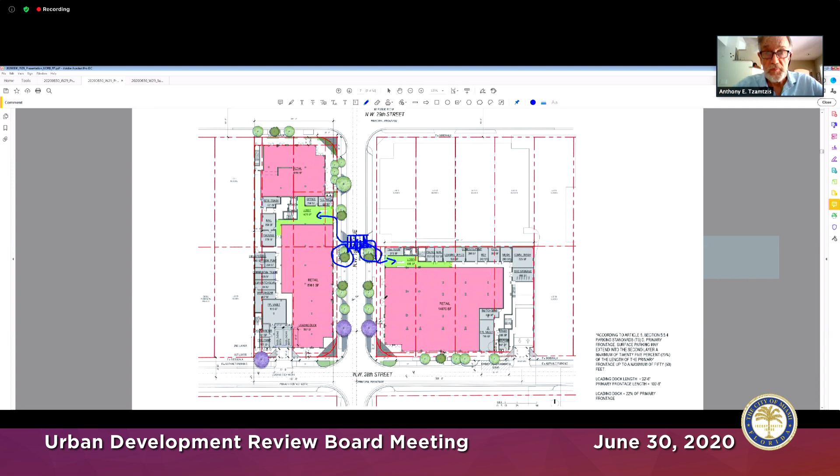But I hope you understand the nature of my comment, though. Yes, absolutely. I do agree that connection should be celebrated in some manner, and maybe it's not even a solution that has to be so man-made. Maybe it's a solution where we put 2 specimen trees at that location that are colorful. Anything. Sometimes a landscape solution is more elegant in this sense. Correct.

If I may jump in here, I agree, Ray, and you guys have done a great job. I like the building. I like the whole project, completely. Really, you've done a great job. And I agree with a lot of these comments. There's only one thing that's bothering me, and I think we already addressed it, but can you go to one of the renderings that you have, please?

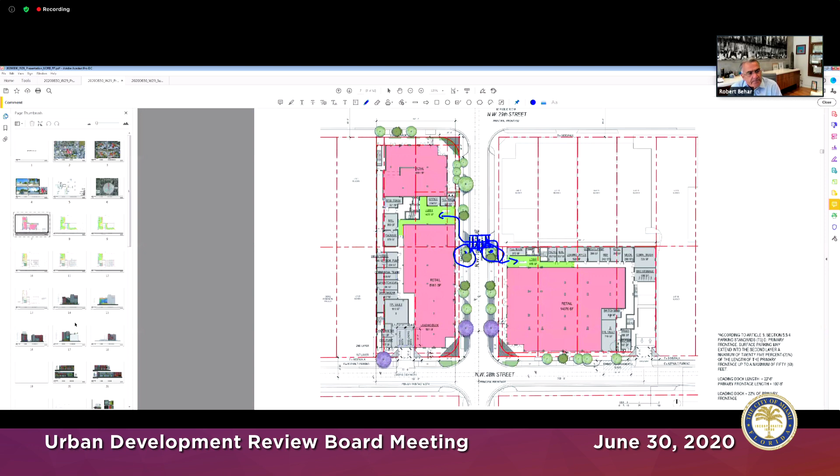Is there a particular one? Give me one. You know what I see there? I see not a painted stucco, I see a precast concrete building. When I saw this, I saw it as a precast material, with the forms that you have. I was a bit disappointed to hear the painted stucco, to be honest.

Other than that, I like it because it's different, and the materials and the colors and everything. That was my only concern. Now that you went through the presentation, I wish it would be a more substantial material. When I first saw it, a precast is what came to mind. Other than that, I think this is a great project. I'm ready to make a motion to approve the project with the friendly amendment that my colleagues will have.

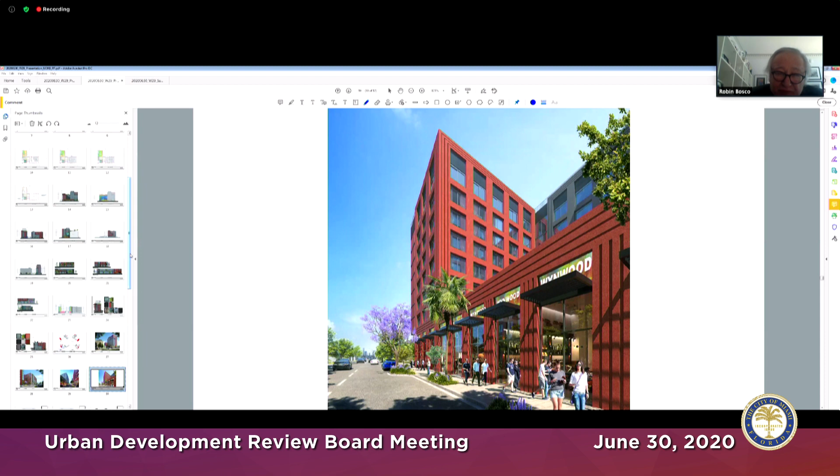This is Robin Bosco. Before we go on to approving, I have one clarification I'd like from Raymond. Can you hear me? Yes. Okay. Ray, first, I'd like to commend you and your firm on an excellent project, and I sympathize with the issues of the color and what have you. But in your presentation, you did some discussion on these mural walls and which ones would, as the area developed, become less plain blank walls and have adjacent buildings to them. Could you elaborate on that?

And the reason I'm saying is, again, we talked about the fading of paint and the colors, but these big mural walls, if they're going to remain exposed, I'm concerned about their permanency and the intricacies of them, and the possibility of articulating them a little more than just the painted colors.

I think that with the mural walls, they typically have a lifespan, and when it becomes time, they're often painted over with a new mural. When you go through Wynwood today, you never really see the same murals there all the time. It's sort of a constant revolving condition. So for what we know now, there are no planned projects currently abutting any of these red locations. But in other instances, there are planned projects.

This was one of them that I was pointing out, where only half of this wall is having a proposed mural because there is a residential project abutting this side. So we've only planned it to be on the one side that makes sense. But yeah, you're correct in the sense that the mural doesn't last forever. Like anything, it needs to be updated or touched up.

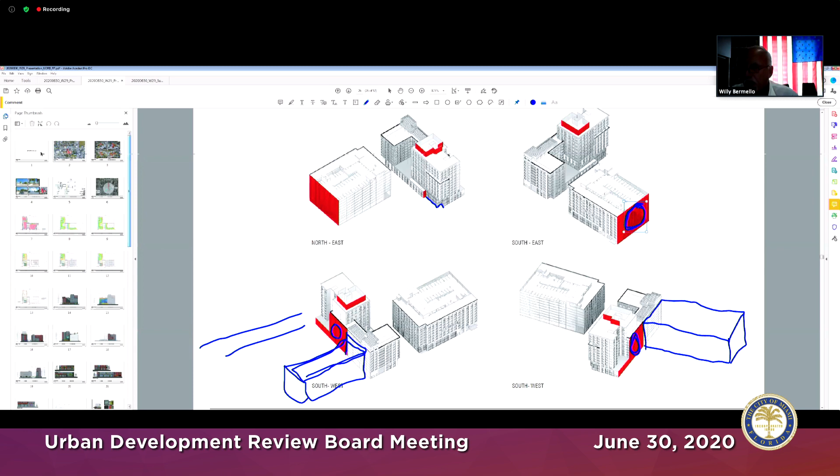But when you do the painted stucco, the elegance that I see here, I wonder how long it will stay and whether it will even be executed correctly even from day one. So I have a concern with that painted stucco, particularly when you're dealing with the terracottas, with the deep red tones and even the bluer gray. I mean, real concrete work here is pretty lousy. So whether it's a precast or actual stone veneer, to have the crispness of the color and the execution shown in the renderings, I believe the project is going to suffer with that color palette in a painted stucco scenario. So that's that.

I don't want to prescribe it, but you have the attorneys, you have the developer, everybody listening in, and I don't know if it was Dean or Ignacio Permuy who highlighted the fact that they've done a number of things that are costly, that are not really, commercially speaking, something that you do when you're trying to be frugal.

So when you do single loaded corridors, when you step back and drop and create multiple courtyards, I mean, those are all very nice, expensive things that are being done for the benefit of not only the project, but really of the city. And so you're doing all of this, but then you're not taking care of the skin of the building. That's a concern.

And I heard Ray describe that it was kind of intentional, that he was figuring that as the color would fade, it would give it those different patinas. And those words sound nice now, but when you see the fading and possibly cracking in such a big building, and the movement of the stucco, then you start thinking about it in a different light. So yes, I would say the issue of color is one that I would like the architect to study.